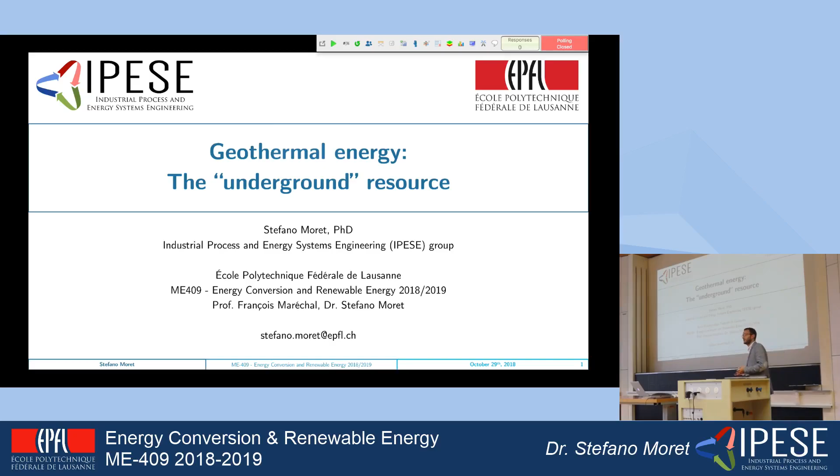In the title I wrote geothermal energy as the underground resource. Once I was at a seminar in Zurich given by one of the world experts from Stanford University on geothermal energy, and he titled his presentation 'the underground resource.' He said correctly that the meaning of underground has two meanings in terms of geothermal: the first is that it's actually under the ground physically. The second meaning, if you're passionate about movies, you might know what this is about - which is that people normally do not know what geothermal energy is about. They've heard the name, but they don't really know.

So I would like to ask you, just by raising your hands quickly, if I tell you geothermal energy, what do you associate it with? What kind of energy service do you relate to with geothermal energy? What can you do with it?

Heating, okay. So how would you heat with geothermal energy? I would say you send water into the ground. Yes, and it heats up, then send it into the houses. Okay, so it's basically what we will call direct use - we just send some water down to the ground, heat it up, and heat the houses.

Other uses - take the vapor from the ground. It's just in some specific places, not everywhere, but then we can use the vapor for cycles. So this is what we call electricity production with dry steam power plants. If we're lucky, we're in a location where we have dry steam just popping up from the ground, such as in Yellowstone, Larderello in Italy, or the Californian coast - we have this resource available.

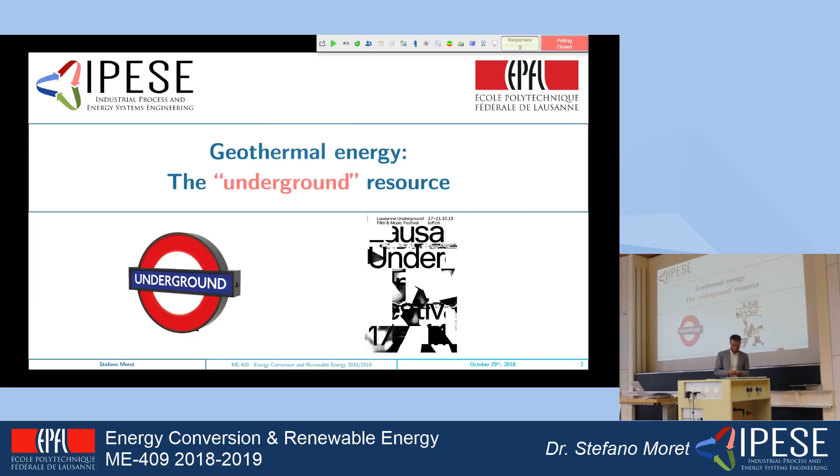So the goal of this presentation, of this lecture, is to give you a brief introduction to geothermal energy, to show you what it's about, and mostly to show you that geothermal energy can be used in a variety of different ways to supply almost all the energy needs that we have, depending on the depth at which we use the geothermal energy. So the goal here is to give you an entire overview of geothermal energy, not only focused on electricity production, which unfortunately is often the only thing we hear when we hear the debate about how to use geothermal energy.

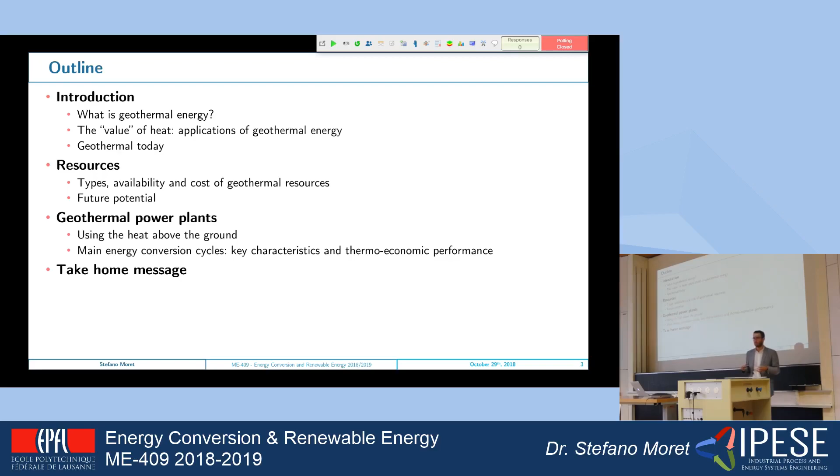You will see during the lecture that using geothermal energy for electricity production is not always the smartest thing we can do, especially in terms of exergy. And at the end of the lecture, we will have a part dedicated to how we produce electricity with geothermal energy, which used to be actually the only content of this lecture in the past.

So, geothermal energy, as the noun says, derives from the Greek - it's energy from the earth. We have heat available from the earth at different temperatures, which comes from the formation of the planet, so the original heat from the formation of the earth, plus continuous radioactive decay of material at the center of the earth. Normally when we talk about geothermal energy, we can only access a very tiny bit of the crust, so applications typically range between 0 and 10 kilometers depth in the ground.

So in the previous lecture, we discussed the notion of exergy. Just to recall, exergy is a better indicator than energy when we discuss a heat source, because it tells us that the heat source has a different value depending on the temperature at which we have it available.

As you saw before with Francois's lecture, and in the first lecture on thermodynamics, when we have an ideal engine, we need two heat sources. If the temperature of the hot source increases, our Carnot factor, the ideal efficiency of an engine working between hot and cold temperature, will be higher. So a heat source at higher temperature has higher exergy content, and when we use it to produce electricity, we get higher efficiency.

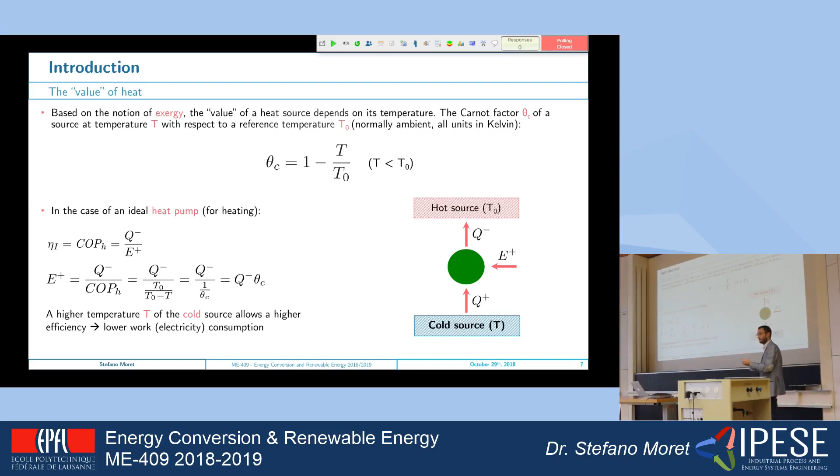That's why, for example, a lake at ambient temperature is a huge source of energy, but you cannot do anything with it because it's at ambient temperature - there is no potential difference. So something at higher temperature will have higher exergy value.

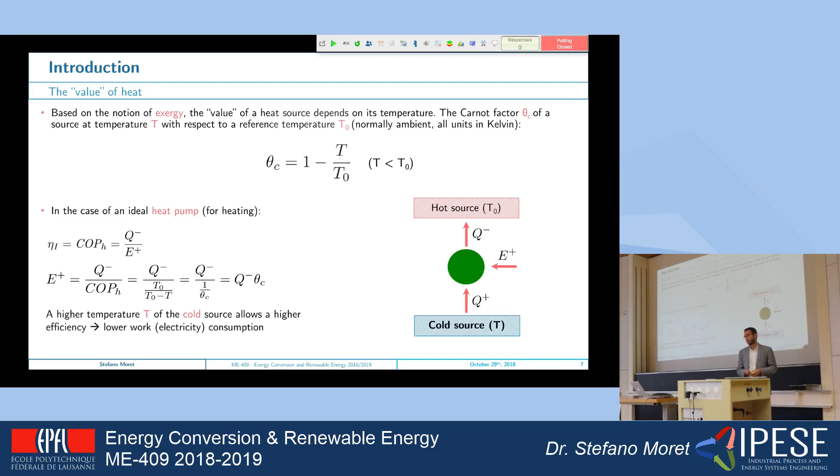So now I would like you to try to answer this question. We mentioned the level of quality of heat - can you estimate the second law efficiency of a gas boiler that you have in your house?

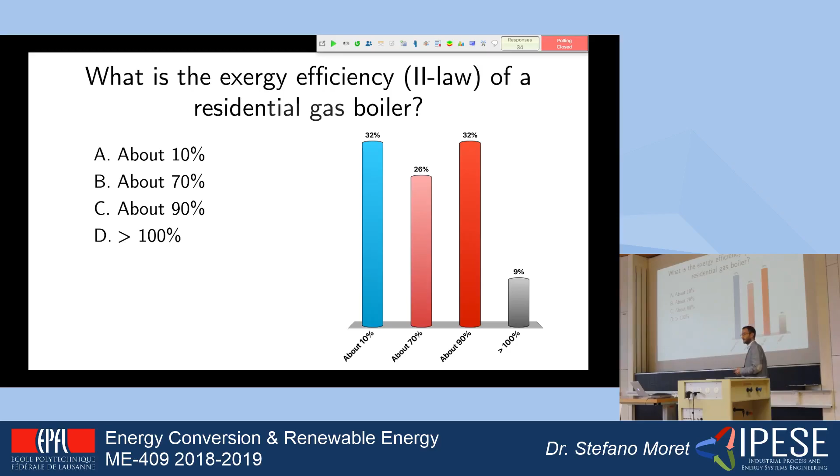But the real efficiency of a boiler, the second law efficiency - I see someone happy there - the actual efficiency is around 10%. Why? Because it's true that we have 90% efficiency in the first law, but we are using the temperature of the flame of natural gas. When we burn gas, we go up to 1,500-2,000 degrees, so we have a very high exergy level content. The Carnot factor is 83%, or even more, maybe 88%.

And then we use it at ambient temperature. So we destroy a lot of exergy that we could have used, for example, to produce electricity and then cogenerate to produce heat. So when we have heat at a very high level of temperature and use it to heat a house, we are destroying a lot of exergy.

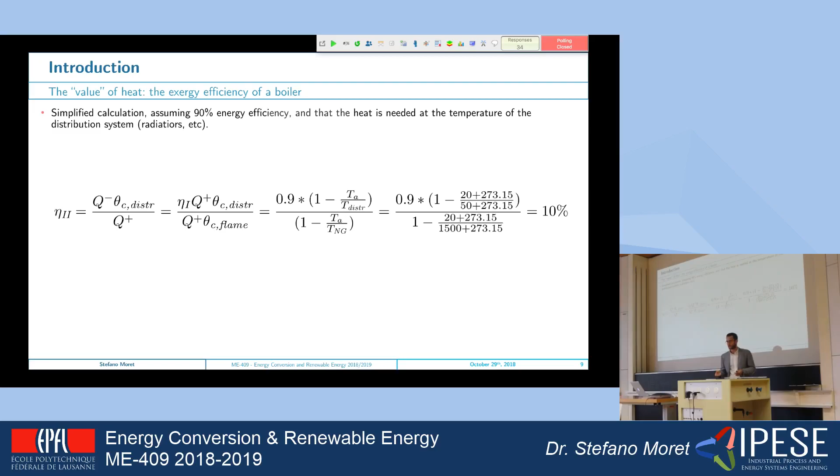So exergy tells us that it is very inefficient, under the exergy point of view, to use a gas boiler to provide heat at 40 to 60 degrees, okay? And that's why geothermal heat is interesting.

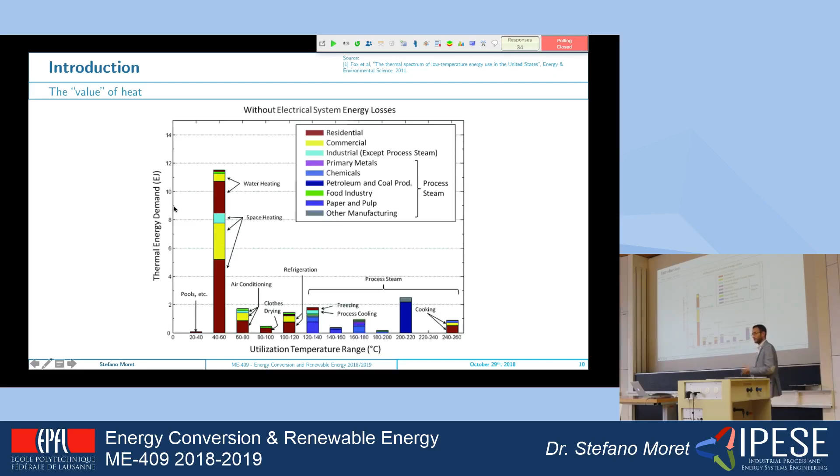So to introduce why geothermal heat is interesting, let's try to answer this question. Let's say we go outside EPFL here in Switzerland and dig a hole of 1 kilometer, just below EPFL. So we're not in Iceland, we will not find dry steam and so on. But what is the temperature you would expect to find when we get to 1 kilometer depth below EPFL?

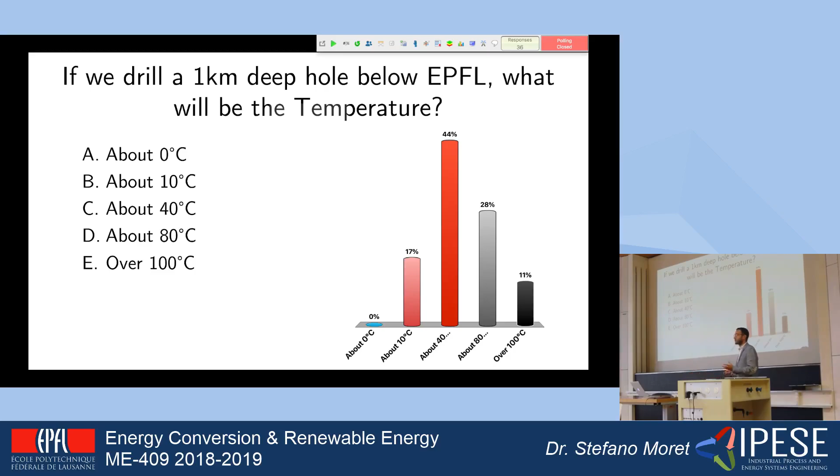Okay, so 44% of you is correct. Roughly, this is the concept that is interesting, that we normally use for geothermal.

So when we look at a given place, we have this concept called the geothermal gradient. The geothermal gradient tells us how much the temperature of the Earth increases with depth. Normally, on the European continental area, we have something in the order of magnitude of 30 degrees per kilometer.

So if you dig a hole just below the ground, normally at 1 to 1.5 meters, you find 10 degrees, quite constant over the year. And then after that, you have to add 30 degrees for each kilometer, okay? So in Switzerland, if we are at 1 kilometer, we will roughly be at 40 degrees.

And then it will be more or less linear for the first, let's say, 10 to 20 kilometers of the Earth's surface. Of course, if we have volcanic activity, tectonic activity, or something else, as we might have in Iceland or Yellowstone, areas of the world where we have steam available, then we might have something higher.

So let's look at what we use geothermal energy for. As I told you before, some of you mentioned directly using the heat for heating a house. Some of you mentioned electricity production.

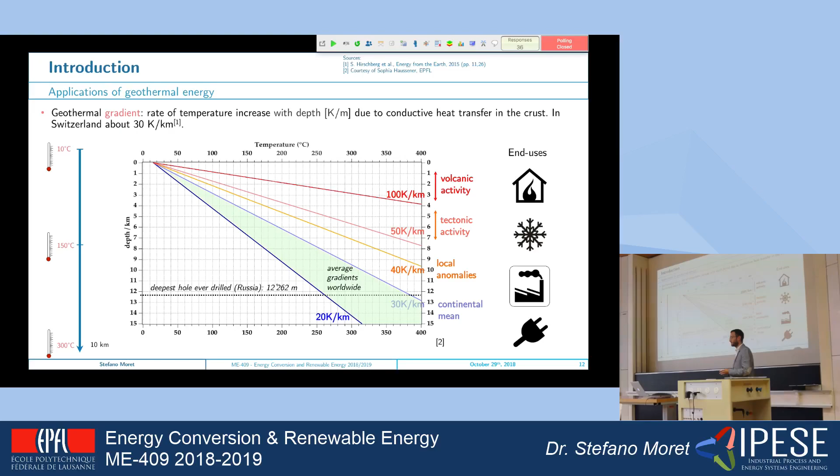Actually, what we can do with geothermal energy depends on the depth at which we are. So if we are up to 300 to 500 meters, what we normally do is use the advantage of having a relatively high and constant temperature over the year in order to use geothermal as the hot or cold source for a heat pump.

So if we want to heat during winter, we have a very high temperature source during winter. If we want to cool, we can directly circulate the cold water through the pipes, and we have what is called direct cooling, thanks to geothermal heat. This is the most standard application, and also the most used around the world today.

And the principles that apply are the same that Francois showed you before. So using a heat pump with geothermal energy will allow you to have a very high coefficient of performance, the COP. If we go at higher temperature, at higher depth, which means between 1 and 4 kilometers, then the temperature will increase.

It will be between 40 and 100 degrees or something like that. So, as you saw before in the graph I showed you, this means that at that depth you have more or less the temperature you need to directly heat your house.

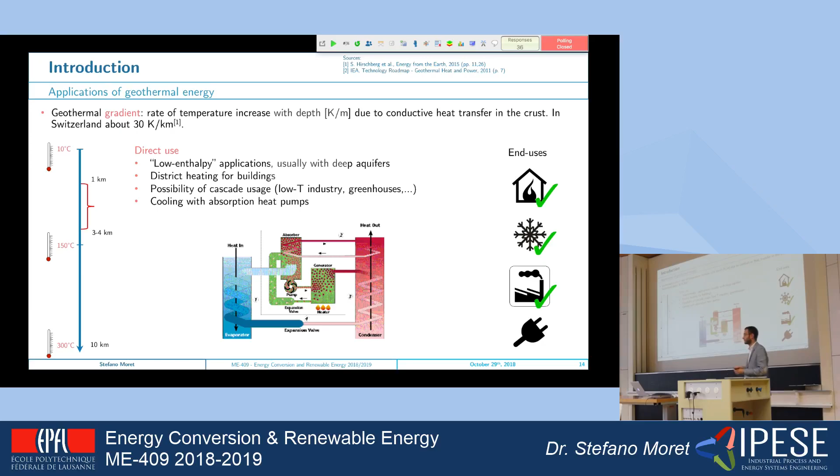So at this temperature, what you normally do is have direct heating for buildings, or you could also do cooling in this case, because there are some kinds of heat pumps that Francois briefly mentioned before, called absorption heat pumps, that work with the principle of using heat, and they have a coefficient of performance of around 1.5 or 2. So you could also use these kinds of systems.

If you go at higher depth, then you can use heat above 100 degrees, let's say 150 to 300 degrees, and you can produce electricity and cogenerate, okay?

So overall, based on the depth at which you are, you can do a lot of things with geothermal energy. Actually, you can do heating, cooling, electricity production, and supply process heat to industry. So when you hear the debate about producing electricity with geothermal, it's not the only thing you can do.

And actually, under the exergy point of view, it's also not the most energy efficient option often, because if you think about it, when you burn gas with a boiler, you have a lot of exergy destruction because you have a large delta in temperature. When you use geothermal, you just go down as much as you need to harvest the heat you need to heat your house. So exergetically, and also energetically, it's a very efficient way of using the heat.

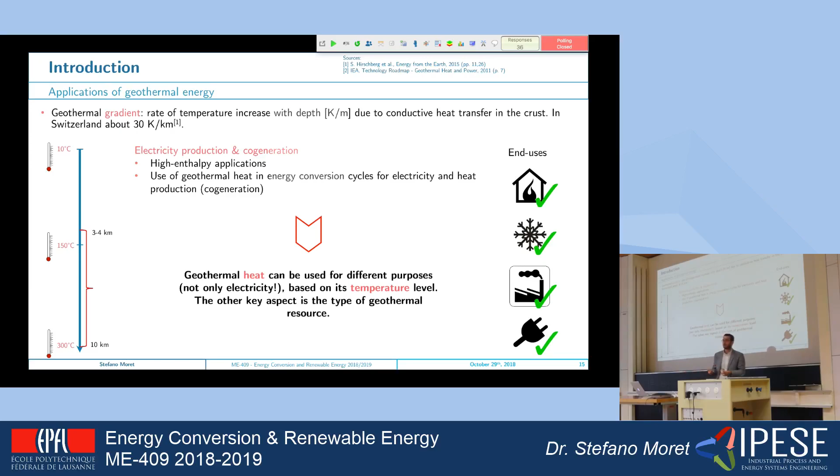So let's look at today what geothermal is about.

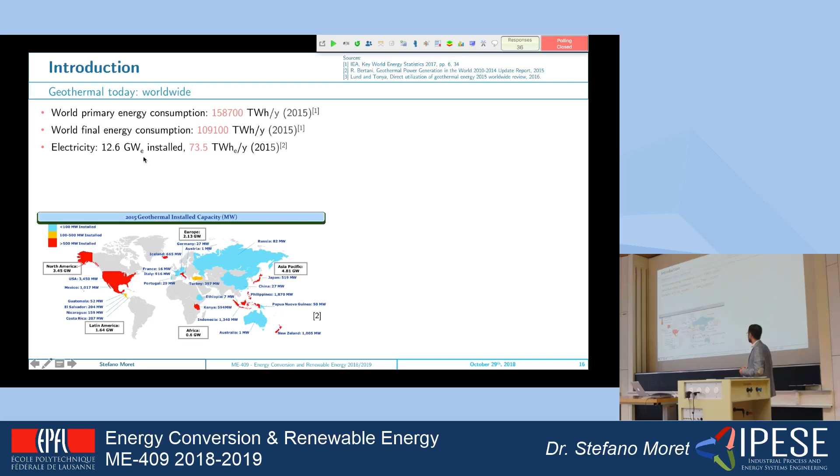If we look at the entire world energy consumption, we see that in terms of electricity we have the equivalence of 12 nuclear power plants built. In terms of heat, we have around 70 gigawatts installed. So if we compare the total amount of electricity and heat produced by geothermal today, it is still pretty small.

It's in the order of magnitude of 0.2% of the entire global final energy consumption. Electricity is mostly concentrated in areas where there is dry steam available, so very good resources, such as Iceland, various parts in the US, national parks and so on. Italy actually has the highest installed capacity in Europe, because there is an area in Tuscany where the geothermal gradient is really high and you have dry steam available.

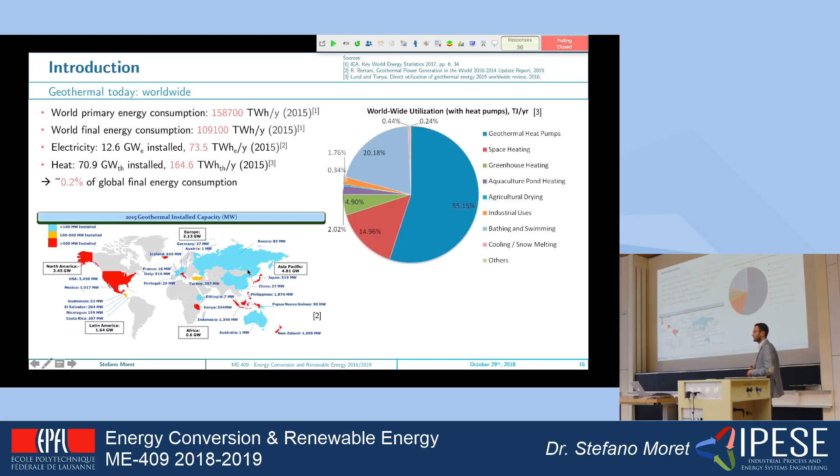When we talk about heat, as I told you before, the most common use is driving geothermal heat pumps. If we look in Switzerland, the share is a bit bigger. Geothermal covers about 1% of the final energy consumption. There is no electricity production, but the use of geothermal heat pumps is quite broad, and it is growing quite a lot.

Especially, I've been working on a couple of projects in Lausanne and Geneva to make use of the aquifers for direct heating of the houses. There are various projects you hear about in the press, quite a lot of installations that are starting.

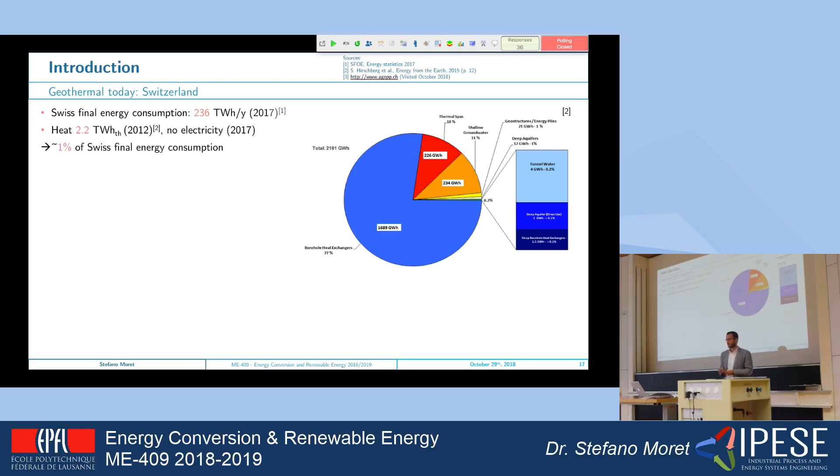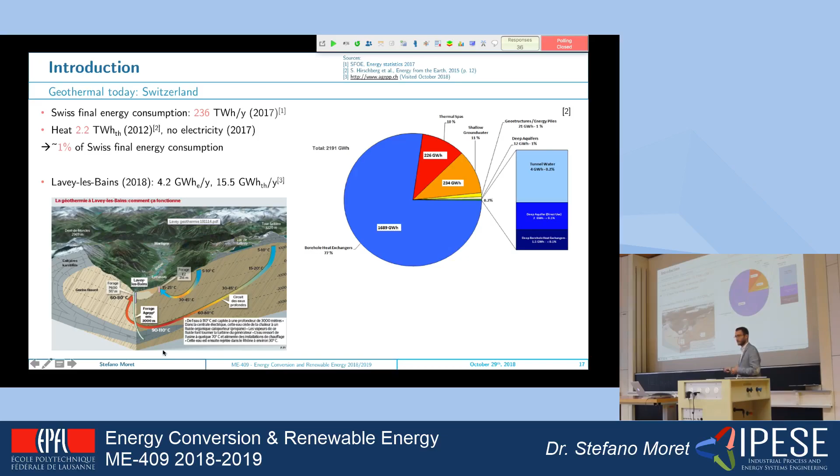There is actually one project, the first project for electricity production in Switzerland, in Lavey. You might have been there for the thermal baths. There they will drill around 3 kilometers and have cogeneration of heat and electricity. So they will produce electricity, and with the waste heat they will give heat to the houses.

If we look at electricity production, as I told you, we have about the equivalent of 12 nuclear power plants installed worldwide in terms of geothermal. They are increasing at a rate of about 350 megawatts per year. The first power plant was built in 1911 in Italy.

This picture here is the first ever installation done with geothermal energy, when they used dry steam to just produce electricity for lighting a light bulb. This picture is from 1904, the first demonstration that we could produce electricity with geothermal energy.

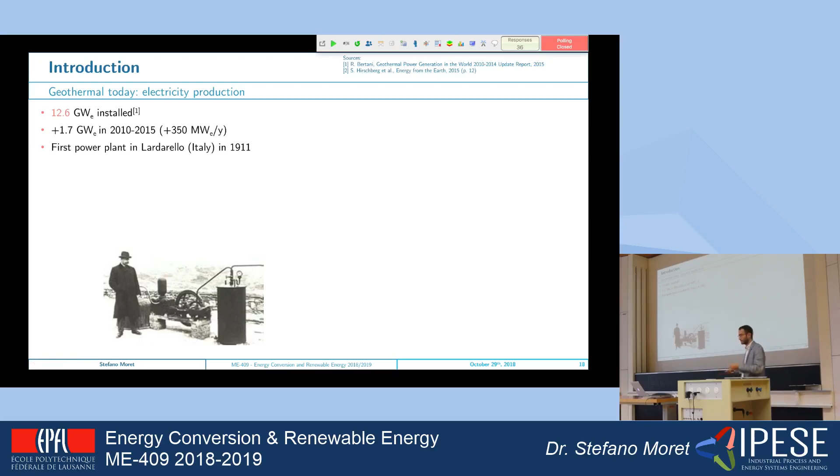Some countries rely on geothermal almost entirely. In Iceland, geothermal makes up about 68% of the entire energy consumption of the country, and 29% of electricity. There are also other countries heavily dependent on geothermal.

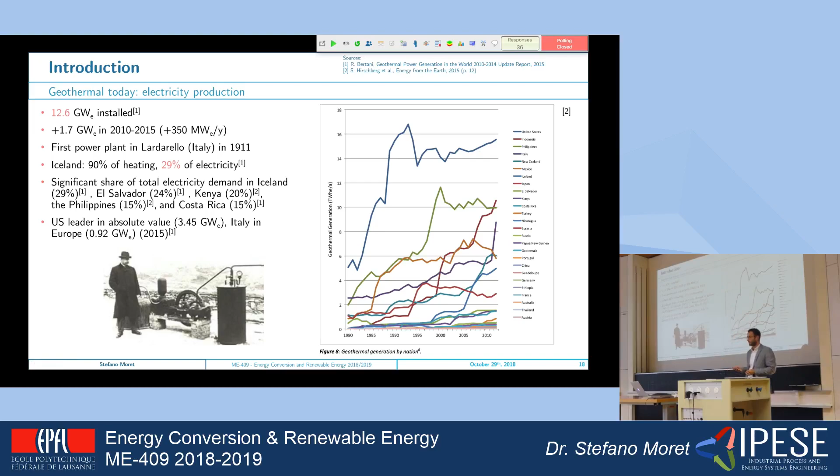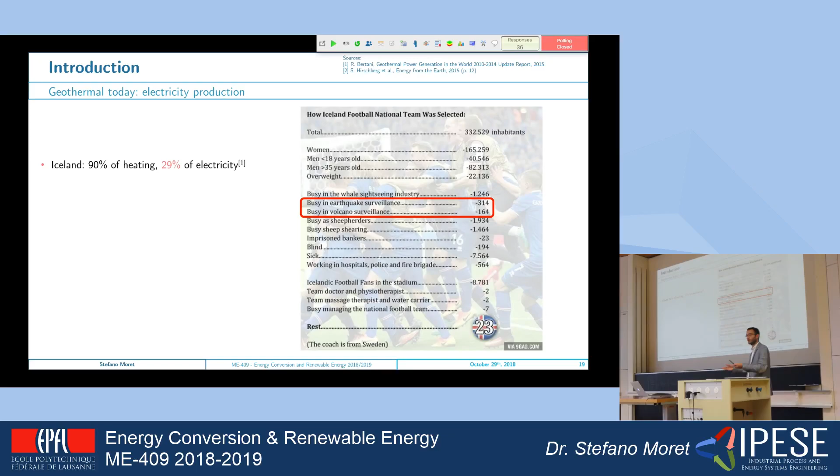You might remember from the World Cup or Euro Cup, they made this graph of how the Iceland team was selected, showing that earthquake surveillance and volcano surveillance is an important activity in Iceland. This means the reason these places have a lot of geothermal today is because there is very good potential: they have dry steam available at high temperature, volcanic activity, and so on.

So let's look now at the resources. What kind of resources do we have available? Usually we make a distinction between different resources based on their characteristics and so on.

The first ones are what we call hydrothermal resources. These are the ones we find, for example, in Iceland, the US, and other places, where we are lucky, let's say, and have very high temperature steam available very close to the surface. These are very location dependent, normally located close to tectonic plates and so on. They are the only ones that are very cheap to run because basically you just have to drill a hole, and there you have dry steam and you produce electricity. These are the most common geothermal sources we still find today.

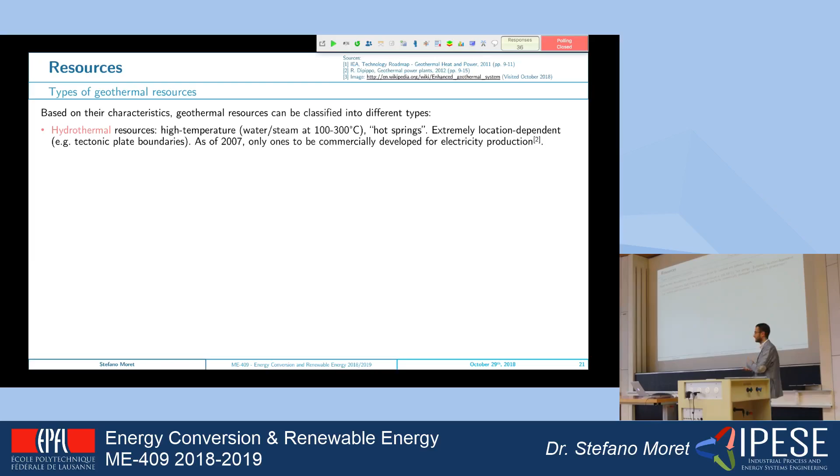In countries like Switzerland, where there's no particular geology that favors geothermal, we can still have our system, but we need to drill as deep as necessary to produce electricity or heat. This is the kind of system you might have heard about - there was one in Basel and one in St. Gallen, experiments with enhanced geothermal systems. What you normally need to do is drill deep into the earth, then use water at high pressure to create permeability, so you can circulate the water and obtain heat above ground.

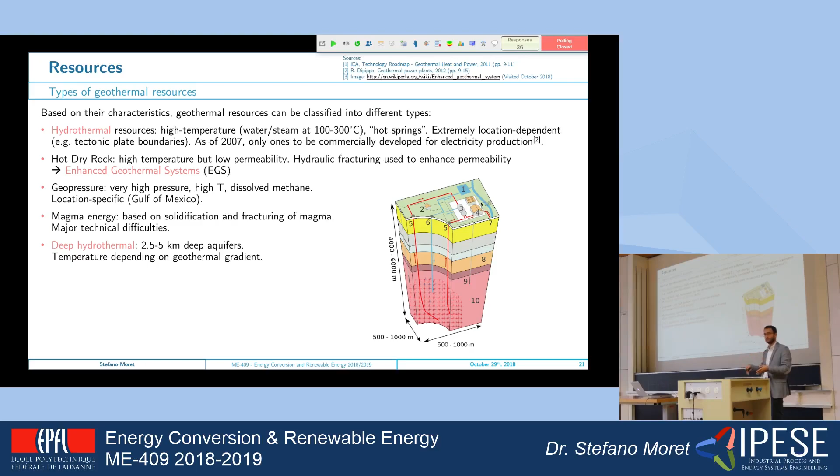Another interesting resource, especially in Switzerland and other countries, is deep hydrothermal. This basically means you have an aquifer - you drill down into the ground and find water, which has a temperature based on the geothermal gradient. For example, under Lausanne there's a very big aquifer called the Malm aquifer. It's about 1.5 kilometers deep with a temperature of around 50 degrees. These resources are very good because you already have water - you don't need to inject it, you can just drill and pump it up, and you have water available at that temperature.

As I told you before, hydrothermal resources are very location dependent. This means they're located in particular areas of the Earth, so you just have to be lucky to find them where they are.

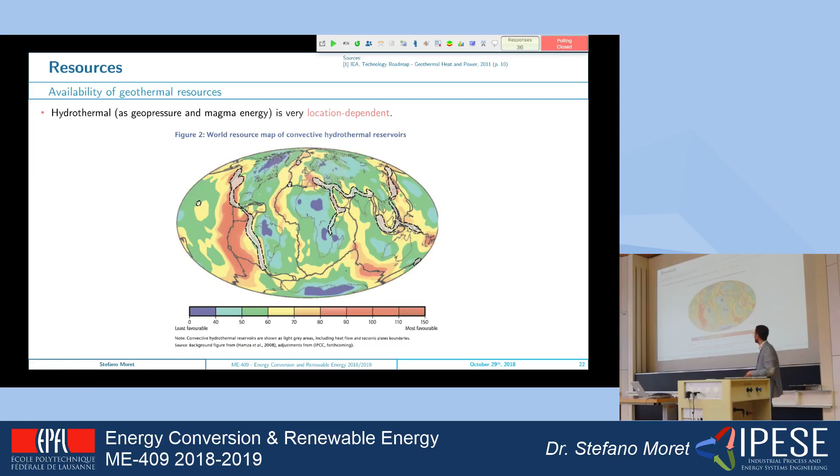Instead, there are other technologies, such as heat pumps and enhanced geothermal systems, that don't really depend on location. This is actually the current trend worldwide - there's a natural progression from using hydrothermal resources, which are high quality but very rare, to using lower quality but everywhere-found resources. For example, in Switzerland you cannot do hydrothermal because you don't have steam available at the surface, but you can use heat pumps and enhanced geothermal systems, which have very big potential.

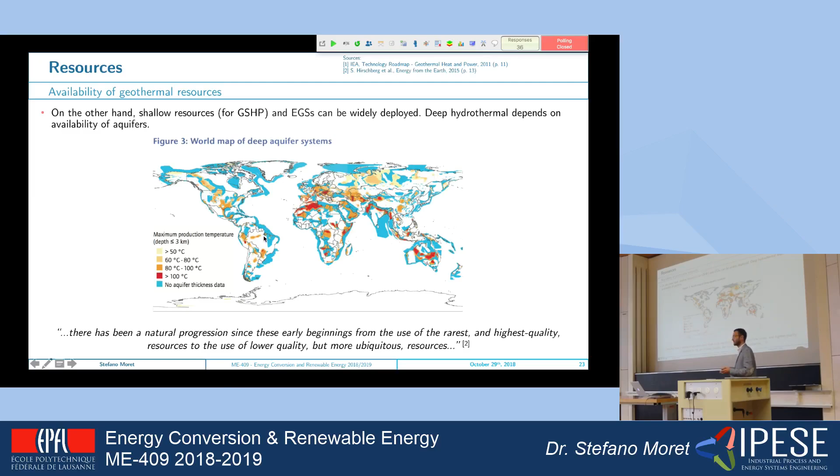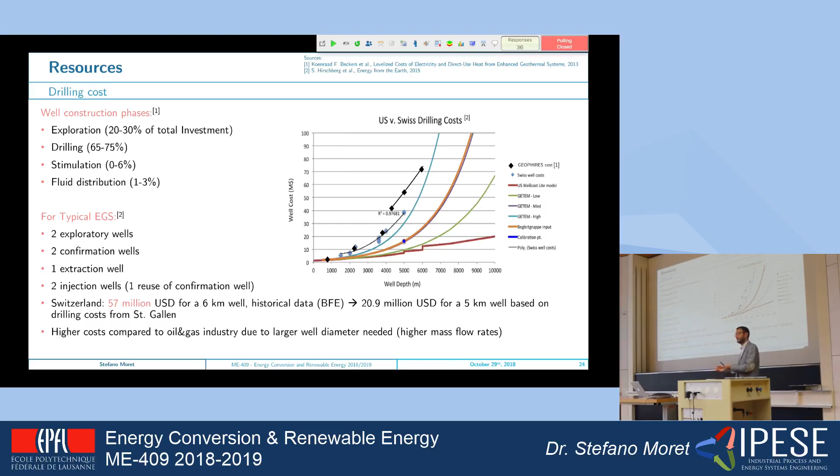So here I report a breakdown of the drilling costs, which is of course the main problem and main cost with geothermal. Just to give you an order of magnitude, in Switzerland historical data shows it was roughly $60 million to drill a 6-kilometer well. In our Swiss example, it cost around 21 million to build the well in St. Gallen. The cost and technology is basically the same as used for oil and gas, with the only difference being that here you just put water inside, whereas with oil and gas you're normally looking for other resources.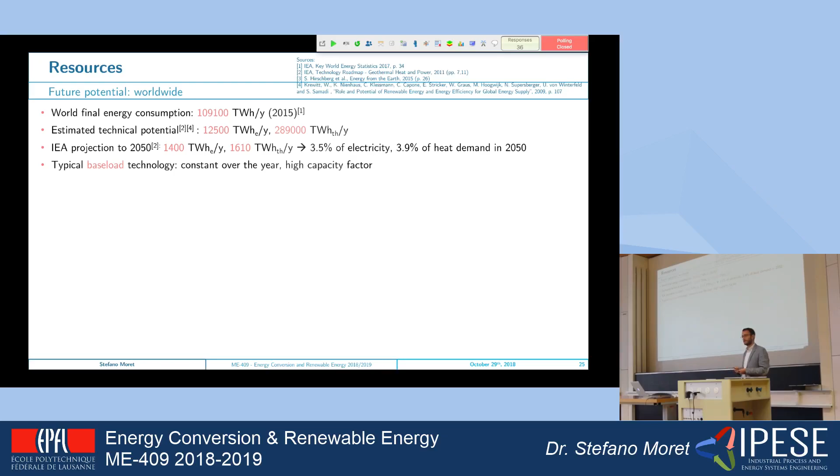Another characteristic is that geothermal is a typical baseload technology. Compared to, for example, wind or PV, geothermal doesn't fluctuate over the year. So when you have your power plant or heating system installed, it will run basically the entire year constantly, which is a difference from other renewable resources.

This graph shows that if you're in a location like Switzerland, without any particular favorable geology, the technologies you can use are heat pumps, usually at around 100 to 200 meters depth. You can use deep aquifers, as I mentioned with Lausanne, or you can go deeper and drill at higher depth, like 5-6 kilometers, for enhanced geothermal systems, like the ones built and tested in St. Gallen and Basel.

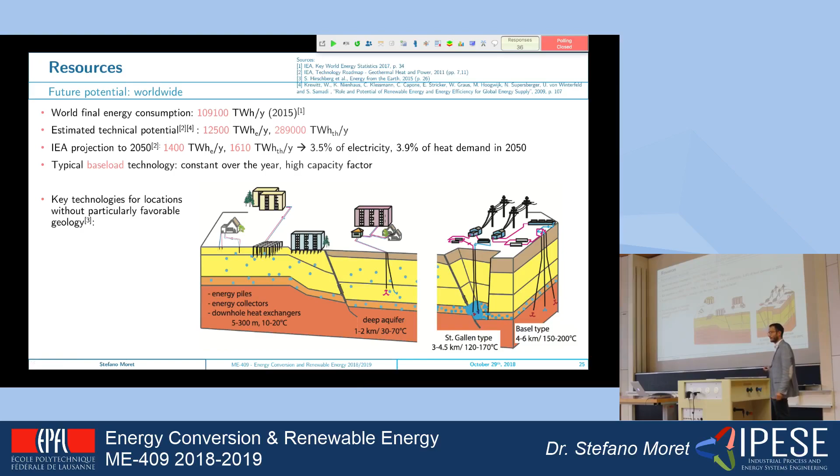The future potential for Switzerland is forecasted - in Switzerland, when we talk about geothermal, we still mostly talk about electricity. So the plan in the Swiss energy strategy is to cover around 7 to 8% of Swiss electricity with geothermal by 2050. As I told you before, it would make more sense probably to focus more on heat production for geothermal, but the debate in Switzerland has been mostly about electricity, so here I report the data we have right now for this reason.

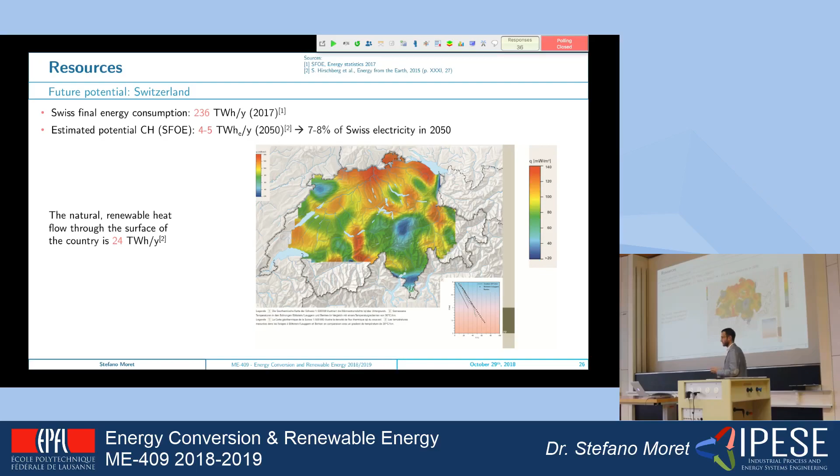Again, the forecast can be around 7-8%, but remember the amount of heat available. I took from a report: if you take the amount of heat available in a 1.5 kilometers thick layer below Switzerland and cool it down by 20 degrees, this is the amount of energy you can extract. You can compare it to the Swiss annual electricity consumption. So the potential down there is pretty big, and it's a matter of choice, the choice of using it or not.

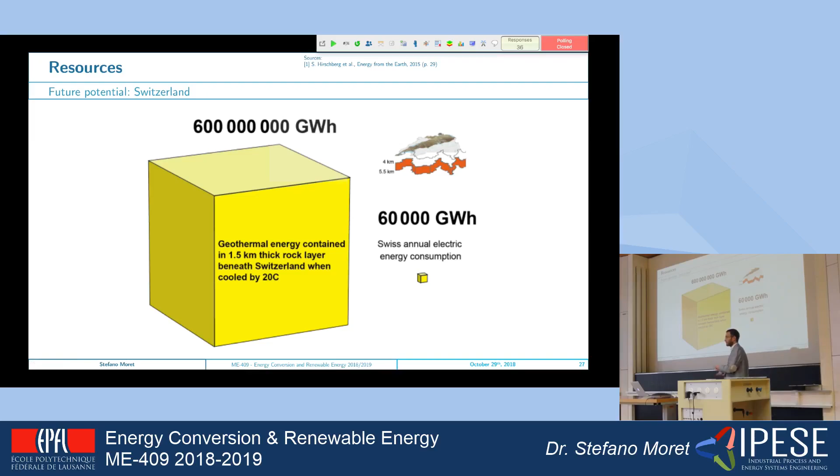So now I pass to geothermal power plants.

Question: What is the lifespan of one geothermal well? Geothermal wells normally work for around 25 to 30 years, because the natural heat flux from the earth is lower than the flow you get from a geothermal well. So you gradually cool the ground, and normally once you've drilled one hole, you have it for around 30 years. That's the standard, let's say.

Do you have other questions up to here? And then I pass to the power plants.

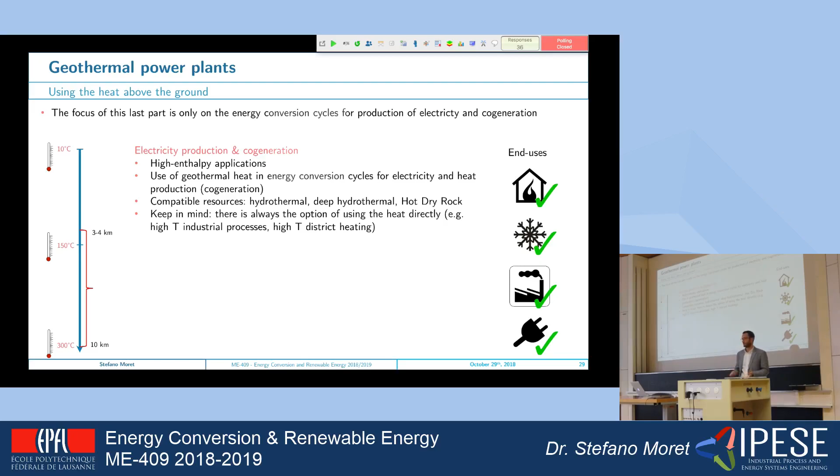This last part of the lecture mentions how we produce electricity with geothermal heat. These are what's called high enthalpy applications, meaning that in Switzerland to do this we have to drill quite deep, around 5 or 6 kilometers, and normally with systems such as enhanced geothermal systems. But keep in mind that even though we talk about electricity now, the heat can also be used directly for industry and for directly heating houses, for example.

What is the efficiency of a geothermal power plant normally? If we have an extraction temperature and a reinjection temperature of a geothermal well, the amount of heat we extract is given by the mass flow times the Cp of water times the difference in temperature. The first law efficiency is calculated with the usual formula, and it's usually quite low - you can expect around 10 to 15%. The second law efficiency, which looks at how well you're building your system based on the temperature levels available, is usually quite high - you can easily reach 45-50%.

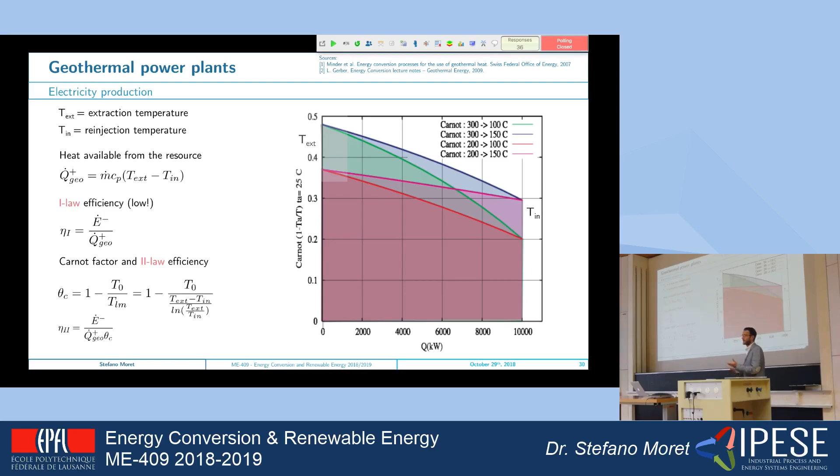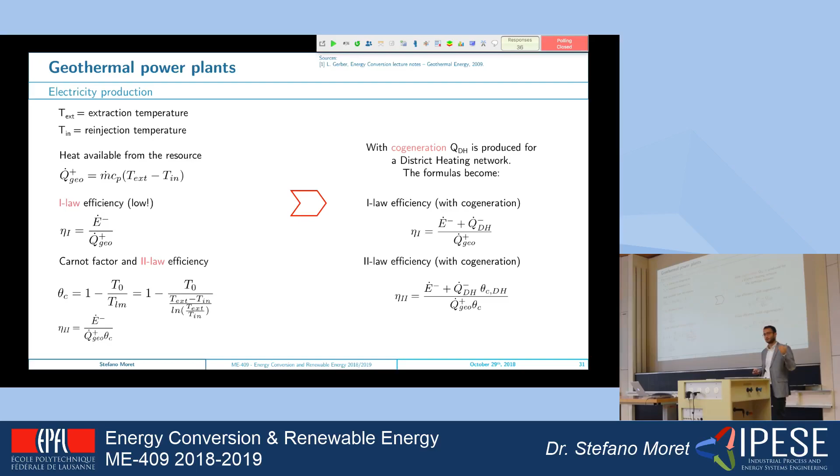You can also use geothermal heat for electricity production with cogeneration, meaning that if you have a temperature high enough, you can first produce electricity and then cogenerate, as you saw in last week's lecture with Francois, in order to also produce heat.

Based on the source we have available, we have different types of power plants. The most classical one is the dry steam power plant, such as the one we have in Italy, for example. This means we have dry steam available and we directly expand it in a turbine, then reinject it. This is the simplest kind of power plant, and it's about 27% of worldwide installed power.

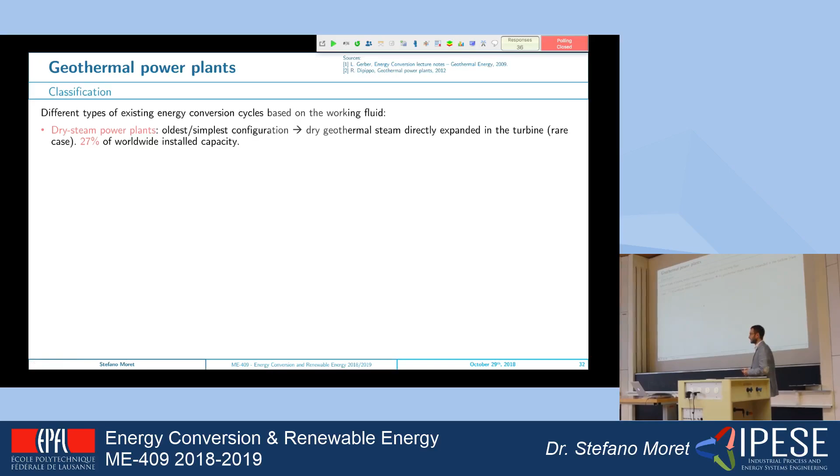If we're less lucky and don't find steam directly from the ground, we find a mixture of liquid and steam - then we have what's called flash power plants. Flash power plants use a flash drum to separate liquid and steam. The liquid is reinjected into the ground, and the steam expands in a turbine. This is normally done in one stage, called flash steam power plants in one stage, or in two stages. Together, these are the most widespread power plants.

And then you have binary cycles. The difference is that in a binary cycle you have two different fluids.

So you have the geothermal water that exchanges with another fluid for the cycle, usually an organic fluid. That's, for example, the one you had in the first exercise in the first lecture, if you remember. So you have, usually it can be toluene or R134A. And these are very good for low temperatures. And then you can also have other hybrid power plants that we'll see quickly now.

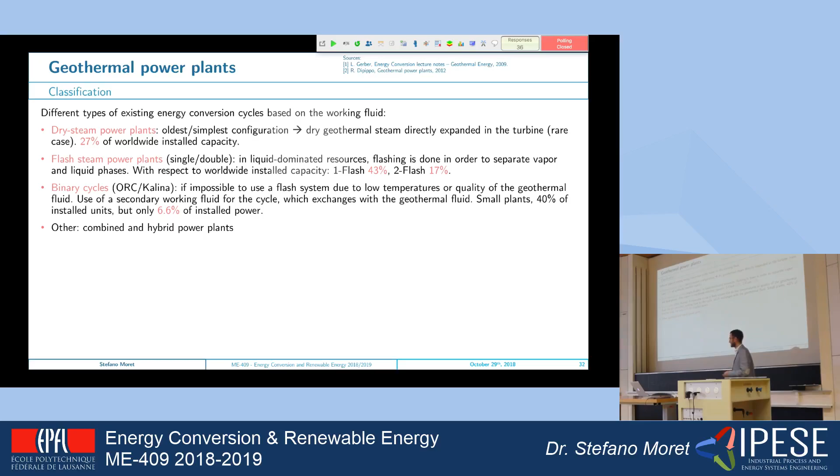So the single flash power plant, as I said, is the most common one. It covers about 43% of the installed power worldwide. It's quite simple, the principle: first of all you have to separate the steam from the water. You re-inject the water into the ground, and you use the steam to expand into a turbine. So actually what you have is quite a standard Rankine cycle, as you saw in the lecture on Rankine cycles, in which you use the steam and reinject the water into the ground.

The problem that you might have in this kind of power plant is that you're directly using the geothermal water, so if you have impurities or gases embedded in this water, you might need to clean them or remove them because it can damage the turbine or other components, or the condenser, for example.

The double flash power plant is basically, as you saw in the Rankine cycle, if you do this kind of process in multiple stages, you can increase the efficiency. So it's a more complex system, which has the same or better characteristics than a single flash plant. You just do the flashing in two stages, and it is more complex to design, but it allows you to reach higher efficiencies, more expensive. It allows you to reach 15–20% higher efficiencies.

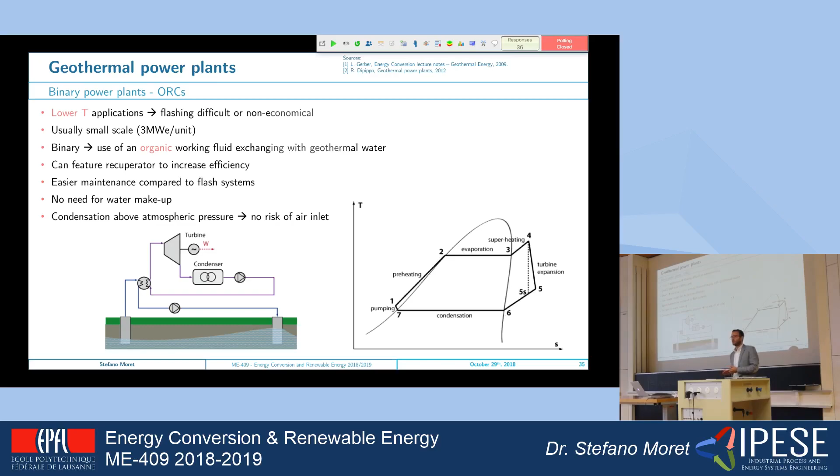And then, as I said, the last kind of power plant is the one you can also use to do whatever kind of heat recovery from low temperature heat sources. So flash power plants are what you use normally above 150 degrees or so. Binary cycles, as you see, use geothermal water to exchange with another fluid, an organic fluid. And the characteristic of organic fluids is that, compared to water, they have a much lower evaporation temperature and pressure, so they allow you to recover heat from resources which have a low temperature available.

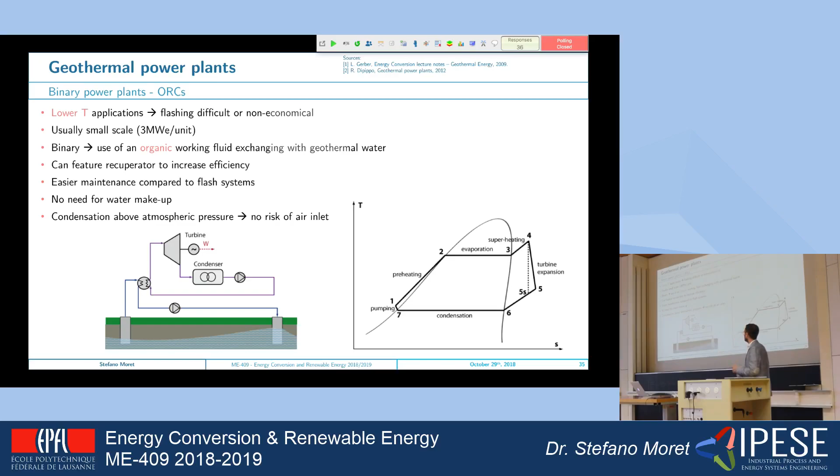So usually organic Rankine cycles are not only used for geothermal. If you remember in the Rankine cycle lecture, I told you that you use it, for example, in cement power plants, or when you have waste heat from whatever sources. It is quite commonly used for different applications.

And the advantage that you have is that these plants don't have the same problem as flash power plants, because you do not use the geothermal water directly, so you don't have all the impurities or the other things left in the gases. You don't have to clean the fluid. You have two separate systems, let's say. The problem is that normally organic fluids are flammable. So, for example, R600 can cause explosions and so on, so they need to be carefully managed.

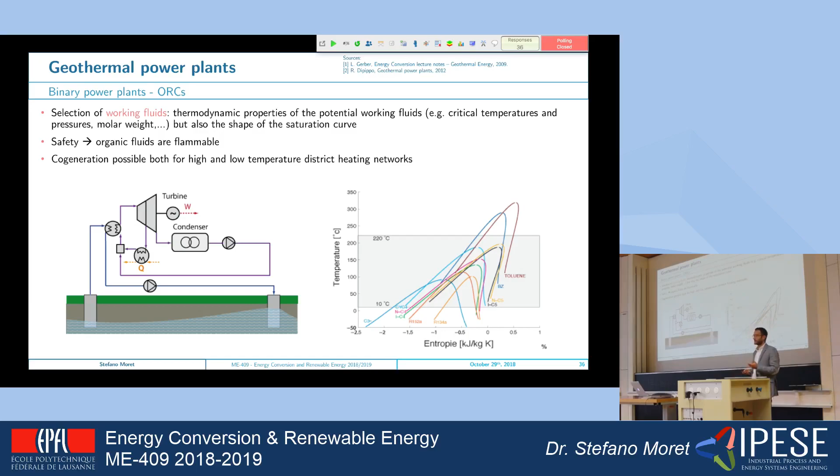And the last cycle that I'll present is a commercial cycle called the Kalina cycle. It is very similar to an organic Rankine cycle. The only difference is that it uses a mixture of water and ammonia. The advantages of this cycle are that ammonia is a known fluid, widely available, and non-inflammable, but it has the disadvantage of being toxic, so of course you have to take care about leaks and so on.

The advantage of having two fluids together is that you can increase the efficiency because you reduce the exergy losses. Because, as you know, water and ammonia, if you take them alone, will have evaporation at constant pressure and temperature. But if you mix the two, the evaporation curve will have a certain incline, and this will allow you to follow the decrease in temperature of the geothermal resource, making the area in the temperature-enthalpy diagram representing exergy losses due to heat exchange quite small.

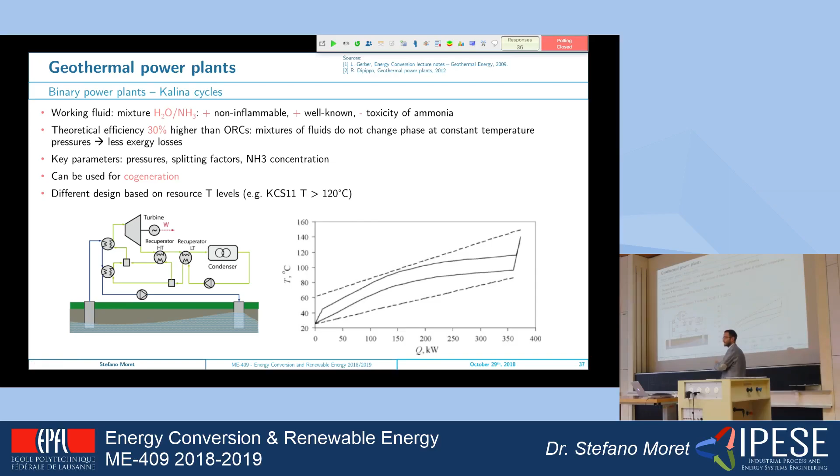So this is simply an evolution of the organic Rankine cycle, which gives you some advantages and increased efficiency. And then you can have other applications. For example, normally what can happen is that you can have a flash cycle at a higher temperature, followed by a bottoming Rankine cycle at a lower temperature.

If you have geothermal heat available close to a gas turbine, you can use another Rankine cycle, using the geothermal heat to preheat the water used in these cycles, increasing their efficiencies. These combinations, like this one using a gas turbine, are what we call hybrid cycles, which combine different sources to increase overall efficiency.

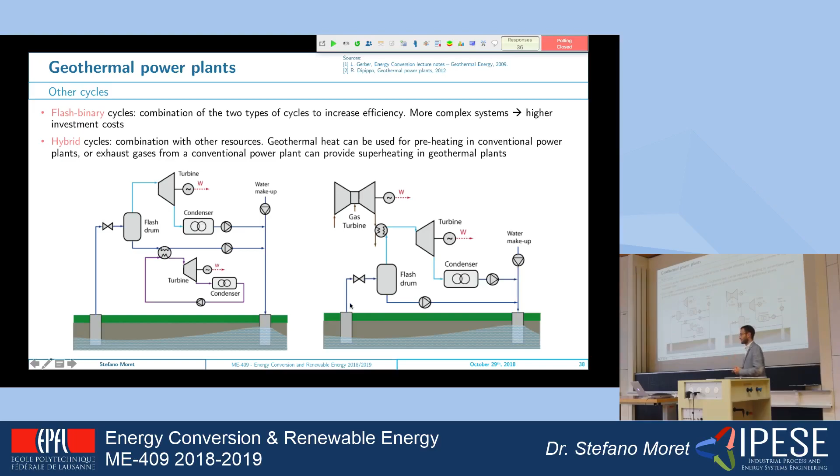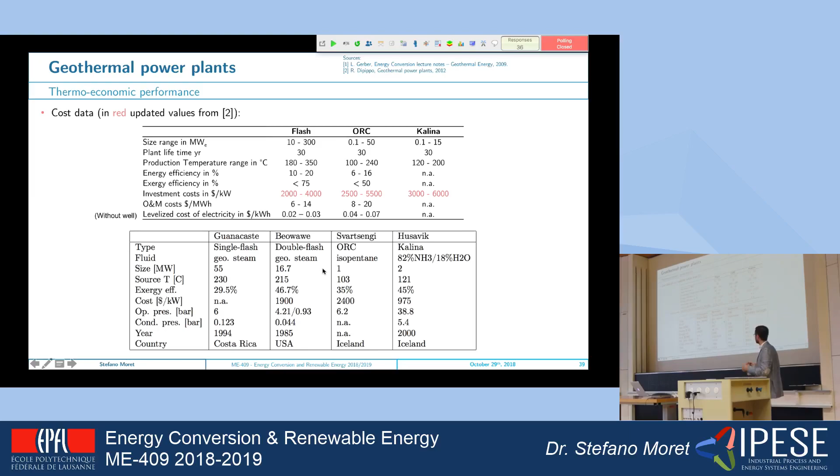Just to conclude, looking at the cost data: as I told you before, flash cycles are more common at higher temperatures. They are cheaper to build and a bit bigger. If you go towards organic Rankine cycles and Kalina, due to their lower efficiency, they work at lower temperatures. They are more expensive, and they are smaller in size.

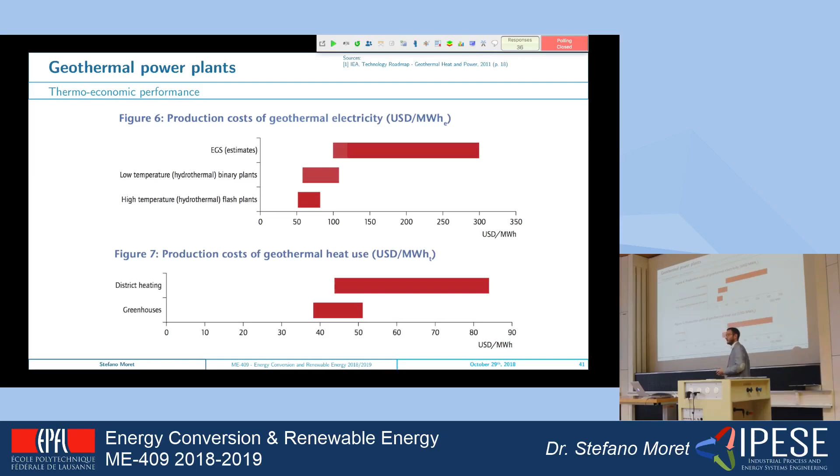Looking at the prices, these data are a bit old, I didn't find an updated version, but due to the different efficiencies, when you use geothermal heat to produce electricity you normally have a higher levelized cost of electricity. If you use geothermal heat directly for heating purposes, the cost is very competitive with whatever other source you use. For example, the price of geothermal heat for greenhouses is very similar to today's natural gas prices, which are very, very low. So it's a very competitive way of supplying heat.

So to recap: the advantage of geothermal heat is that we can use the exergy. We have a very exergetically efficient system. When you hear about geothermal, don't only think about electricity production, but mostly focus on the advantages for heat. The characteristic of geothermal is that it is a baseload technology. Compared to other renewables, it is a non-seasonal and not daily variable resource, so it can be used for baseload heat and electricity production.

In terms of resources, we are moving from a situation where we only used resources available in very specific locations, such as Iceland, where we had dry steam available, to resources that are more widespread and ubiquitous. We have a huge potential, but we shouldn't forget there are also technical difficulties related to that, especially the drilling.

So I didn't tell you much in detail about the projects in St. Gallen and Basel—is anyone of you from this area actually? From St. Gallen. For different reasons, both projects ended up being stopped.

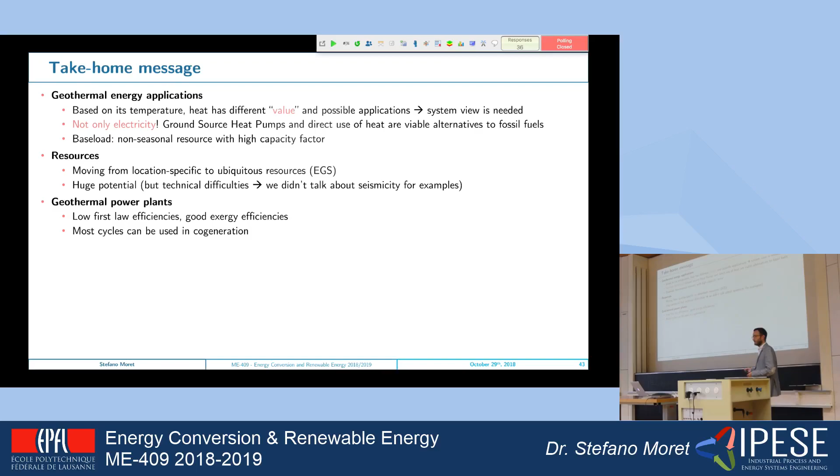That's for sure. And about geothermal power plants, as I told you, normally if you want to produce electricity you have a quite low first-law efficiency but a quite good second-law efficiency. I leave you an exercise in the slides that you can do later, with the solution as well, showing an example of a system built in France, in Alsace, in Soultz-sous-Forêts, where you can calculate all the performance of this system—it's a similar kind of calculation you might find at the exam.